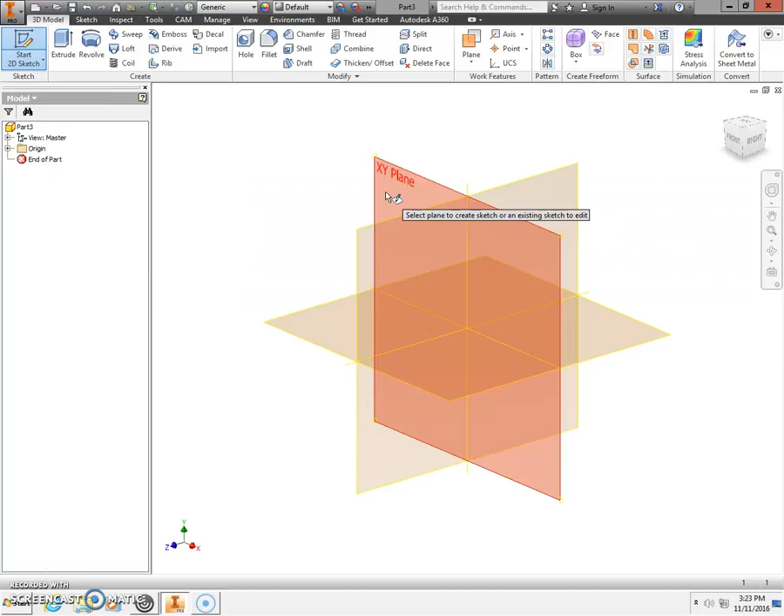Click the 2D Sketch button from the top ribbon, and we're going to put a 2D sketch on our XY plane. Click Front to zoom all.

Then we're going to select our rectangle tool from the ribbon and begin at our origin. Wait for the green dot to appear and click and stretch out a rectangle. The horizontal dimension for our lid for our box is 3 inches.

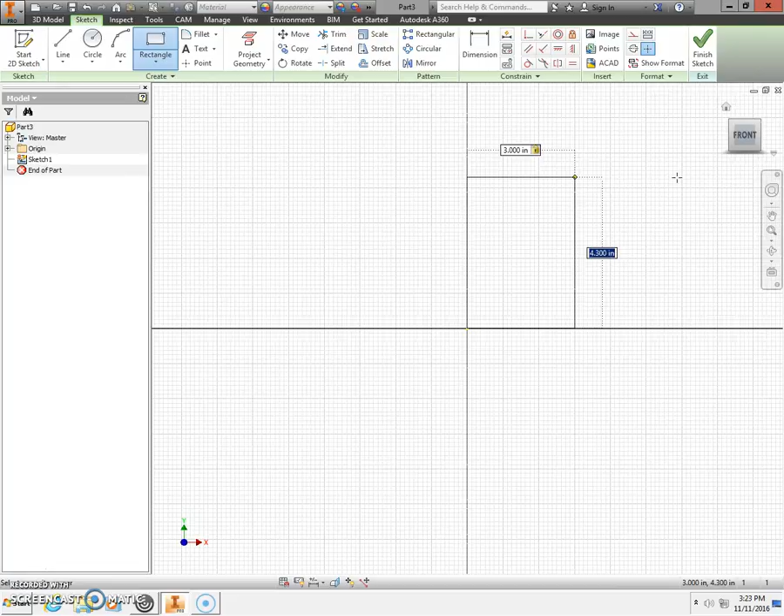Press the Tab key. Our vertical dimension is 3 inches. Press the Enter key on the keyboard.

Now we're going to go up to the top right hand corner of our ribbon. Click the great big huge green check mark.

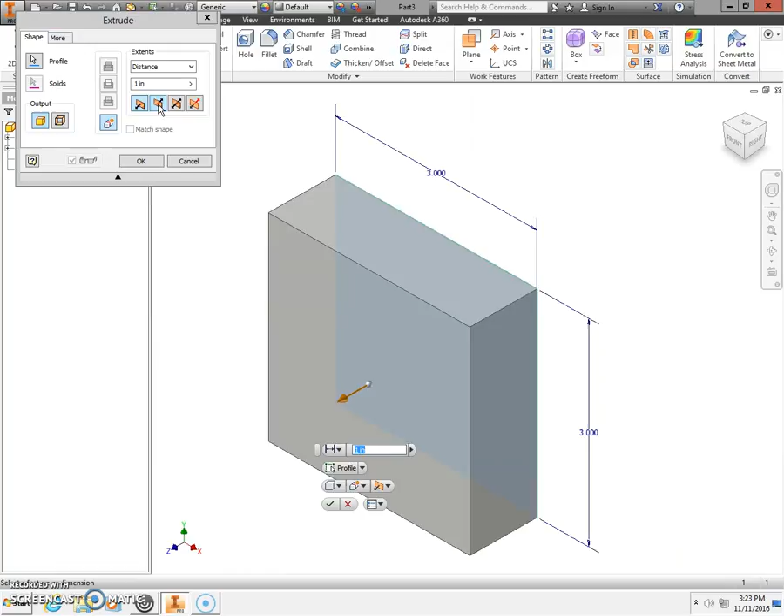I'm going to go home so I can see what's happening to my drawing part, and I'm going to click Extrude next. We're going to extrude in direction number 2, and I want to extrude a distance of 1.5 inches. And click OK. Next we need to recess a hole in here for our lid to fit over the top of our box bottom.

We're going to do that by clicking Start 2D Sketch and place a 2D sketch on our front view.

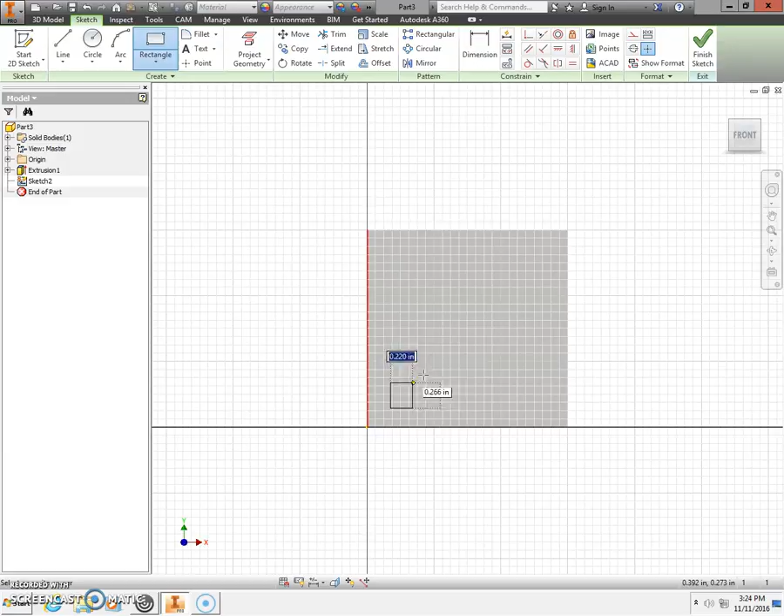Next, we're going to get our rectangle tool, and we're going to start in the lower left-hand corner of my part. I'm going to stretch a rectangle to my upper right-hand side. This dimension is 2.5 inches for a horizontal dimension.

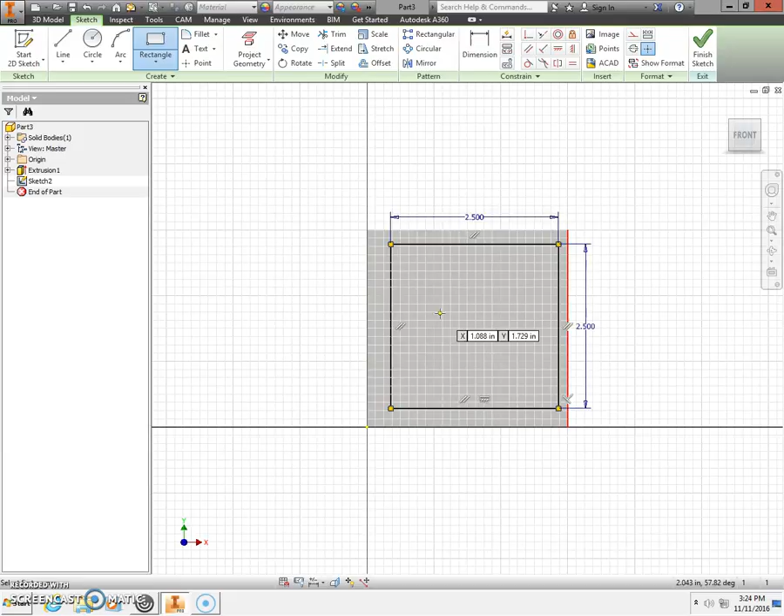Press the Tab key, and 2.5 inches for a vertical dimension. Press the Enter key. Now we need to center this square rectangle that we drew on our part.

So I'm going to take and select my dimension tool. I'm going to dimension from the left hand side of my rectangle or square that I just drew to the left hand side of my part.

Bring this dimension down. This dimension is going to be 1/4 inch, 0.25, and green check mark.

I'm also going to take and dimension from the bottom of the square that we just drew using our rectangle tool to the bottom of my part.

Bring this dimension out to the side. And this is going to be 1/4 inch, 0.25, green check mark.

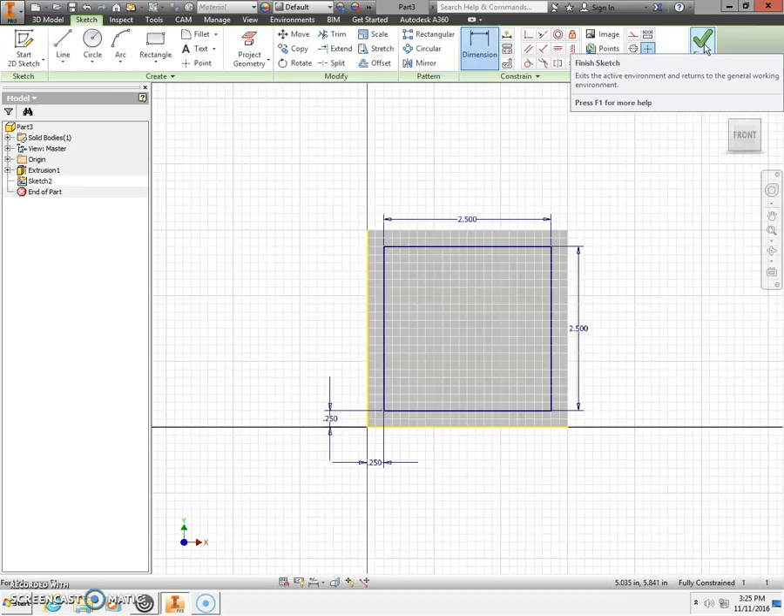With our recess drawn and dimensioned and a location dimension, we're going to come up to the upper right hand corner of our ribbon, click the green check mark, Finish Sketch, and I'm going to click my Extrude button.

I'm going to extrude, select the inner square that we drew. We want to extrude and cut, which is this one right here, the cut tool. And I want to extrude a distance of 0.75, which is 3/4 inch, and click OK.

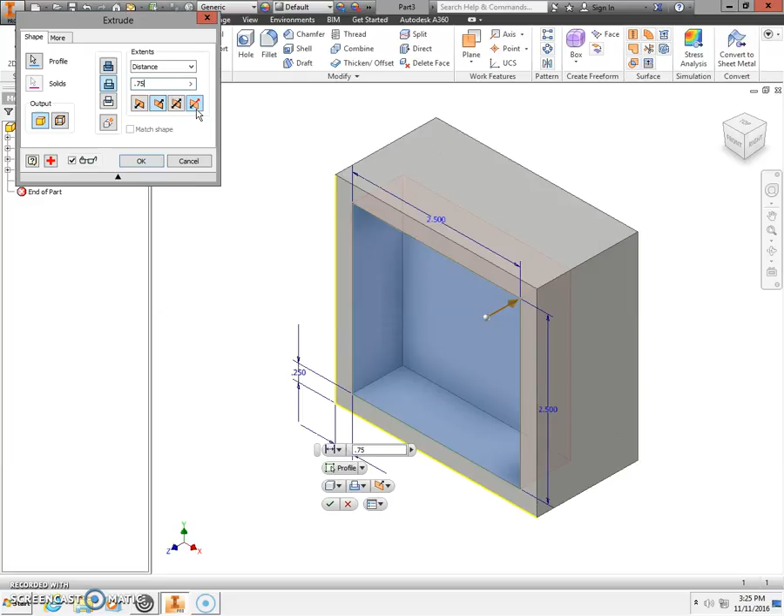Now we're going to come up to the top, right above the word Tab Environments, to where it says Default. And I'm going to change my material type from the default material to yellow pine.

Then I'm going to go up to my orange capital letter I, and I'm going to save as. I'm going to make sure this is going into my H drive, first initial last name 000.

And I'm going to call this my name and 3-inch lid. With an I. And then click Save.

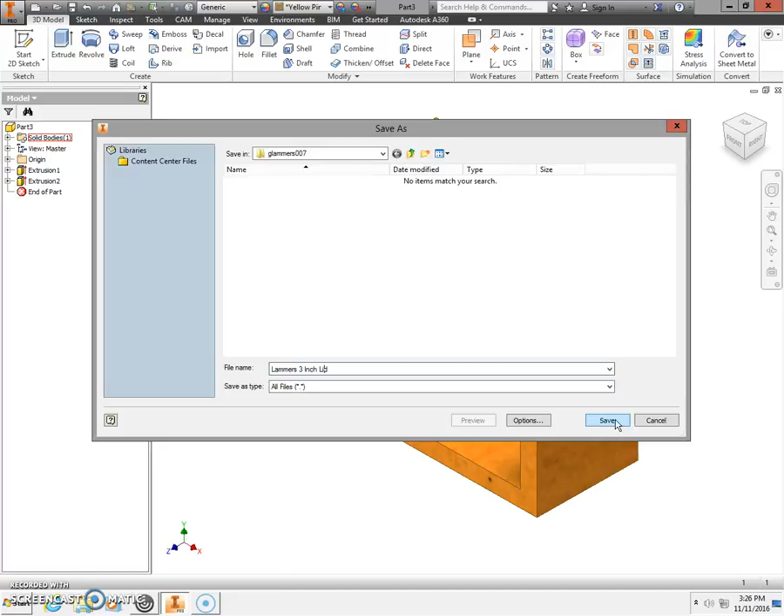Next we're going to take and run our tool paths. So we're going to come up to the top above our ribbon. There are little tabs that are up here. We're going to select the CAM tab, and we're going to set up our job.

So I'm going to click the Setup folder. First I want to change my origin from the middle to the lower left hand corner, so I'll do that here where it says Stock Box Point. I'm going to change to Model Origin. Next I'm going to set my stock up.

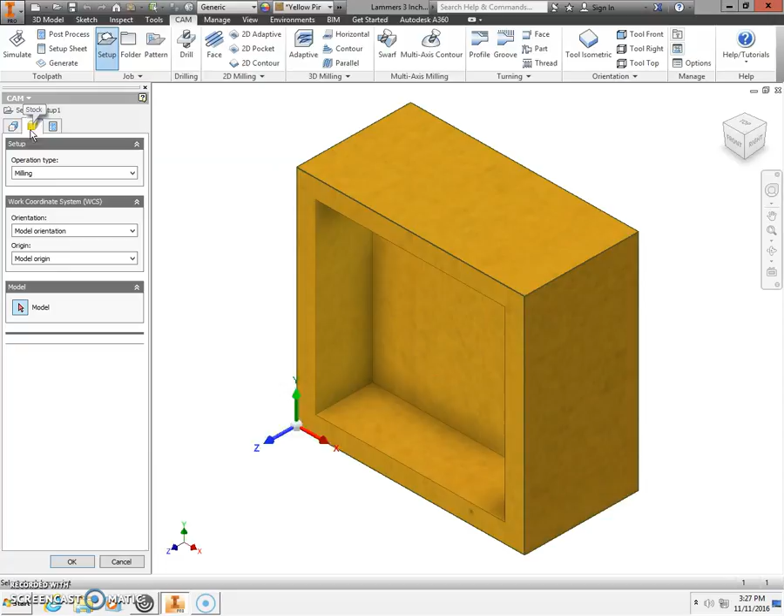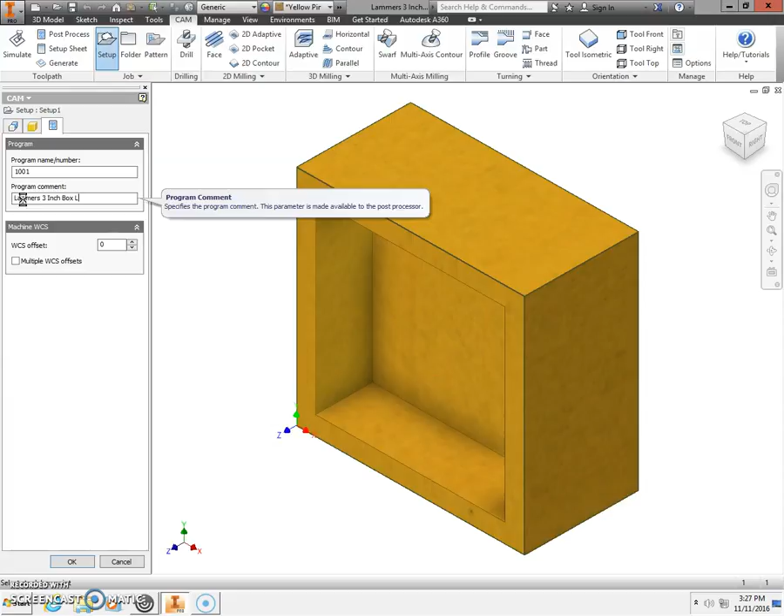I want to make sure that my depth is 1.5, and next I'm going to go to my post processor, and for my program comment I'm going to type in my name, .3-inch box lid, and click OK.

Next, we're going to go to our 2D milling area and select 2D pocket. Remember that we extruded this 3/4 of an inch, so we're going to have to take this in multiple passes. We'll come back to that in one second.

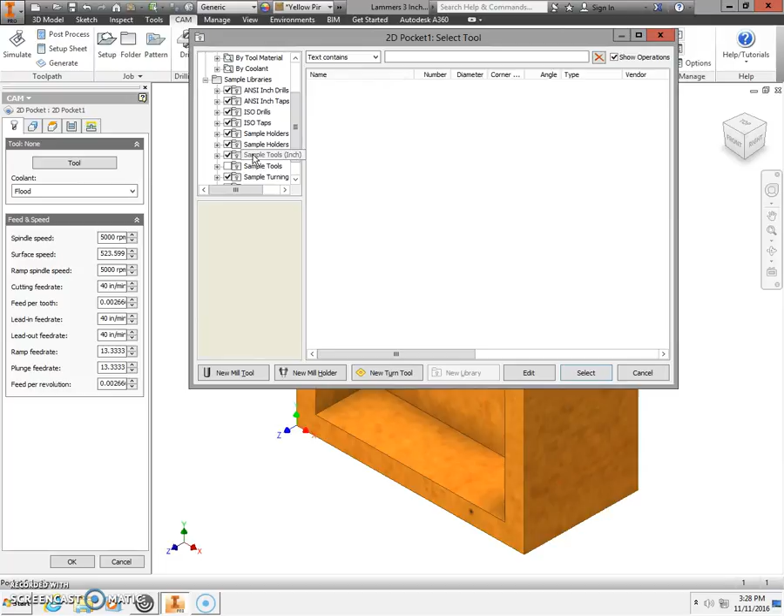When our menu loads at the left, we always work our menus top to bottom and our tabs left to right. So I'm going to select my tool first, and I want to scroll down till I find Sample Tools Inch. The area on the left, I want to scroll down until I can find my 1/4 inch tools, and out of all the 1/4 inch tools here, I want to choose the bottom one, the 1/4 inch flat end mill, and click Select.

Once my tool is selected, I'm going to choose my geometry to select, and here I want to choose only the bottom area of the ditch for the lid.

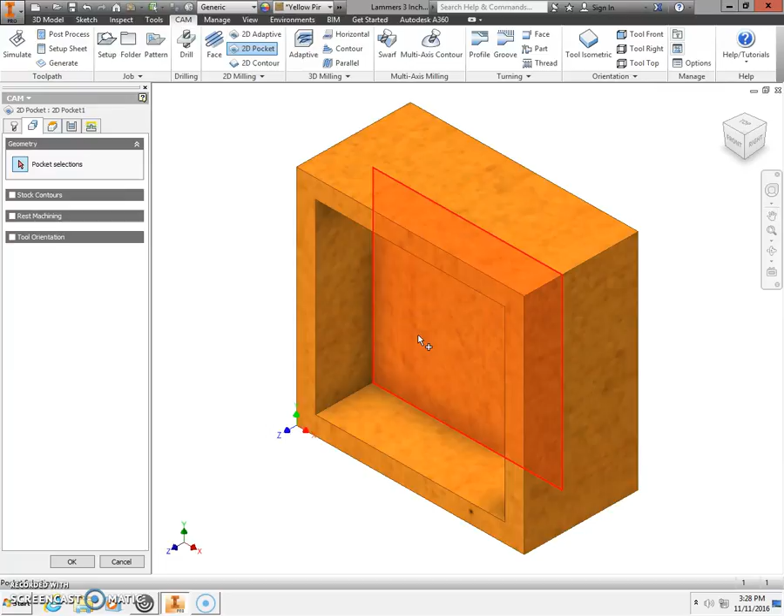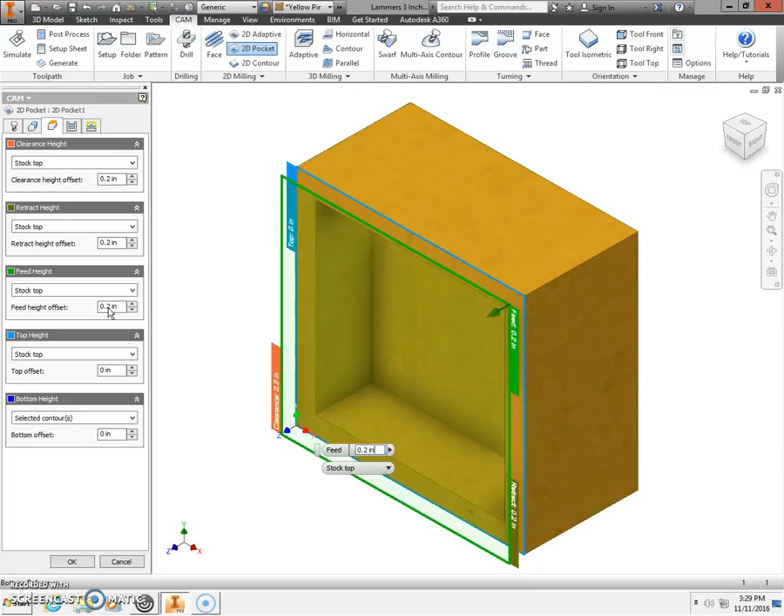Moving over, I want to check my heights. I'm going to choose my clearance height, open that window up, and change from retract height to stock top, and change the clearance offset to 0.2. Let's check the retract height selection, stock top 0.2. For my feed height, I'm going to change to stock top 0.2. Once those are selected, we can move on to our passes tab.

Where it says stock to leave, we're going to deselect that. Next, we're going to check multiple depths—this box needs to be checked. And where it says maximum roughing step down, we want to change this to 0.2. Very important that this is listed at 0.2.

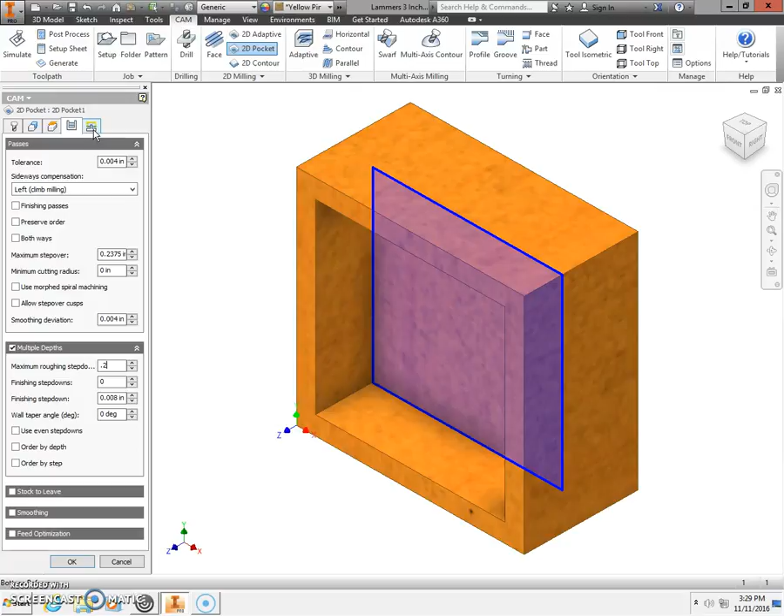And then we're going to move over to our linking parameters tab. Here in the linking parameters, we're going to deselect the lead in, deselect the lead out, and we want to change our ramp style from helix to plunge. Once you have those selected, we're going to click OK.

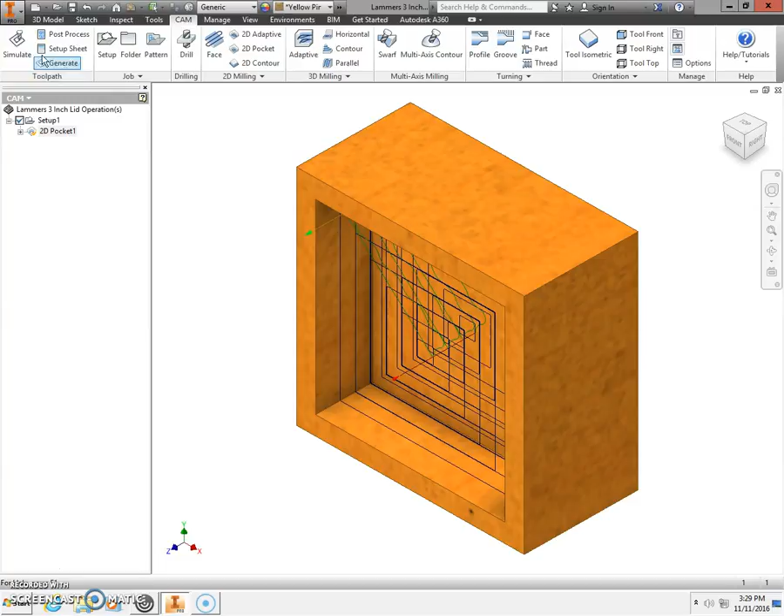It's going to generate your toolpaths, and you can see the multiple steps that it puts in there. Then we're going to click on our Simulate button up in the ribbon. Click Play. Once it goes through and finishes playing your simulation, we're going to click Close.

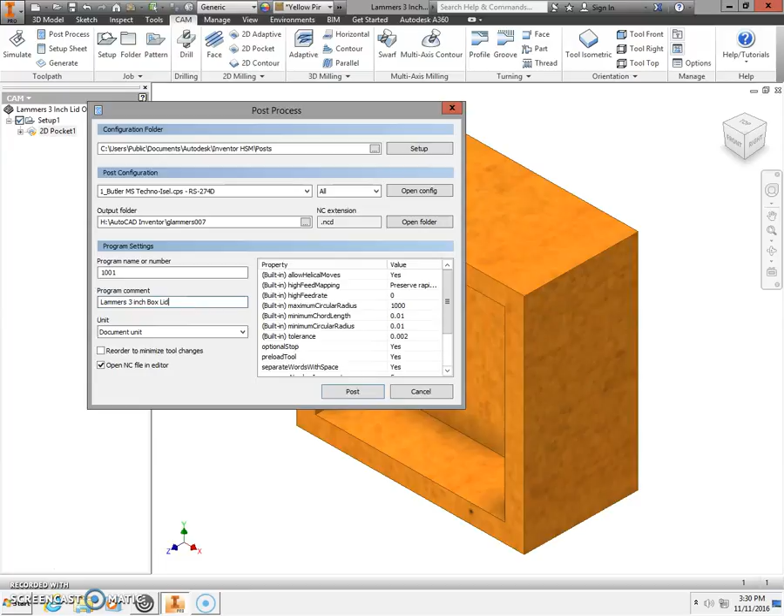Then we're going to choose the Post-Process button, which is right next to Simulate. We want to make sure that Butler MS Techno, the mill we are using, is selected. I want to change this to go to my H drive, first initial last name 007. I clicked right there in order to do that. Lammers 3-inch box, I'm going to change that to lid. So this should read your name 3-inch box lid, and click Post.

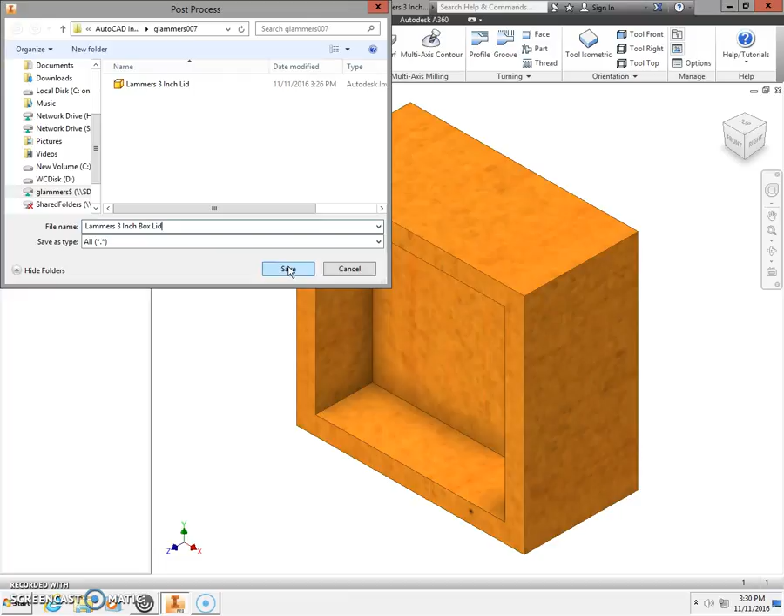Once again, we're going to type in your name 3-inch box lid and click Save. When our M&G code editor, or file editor, comes up, we're going to X this out in the upper right hand corner. You can minimize your Inventor, and then on the desktop you should find a CNC mill icon.

We're going to click on that. We're going to select Translate Execute. I'm going to select my Lammers 3-inch box lid, the NCD file, and click Open. Select OK on this window, and now I want to preview.

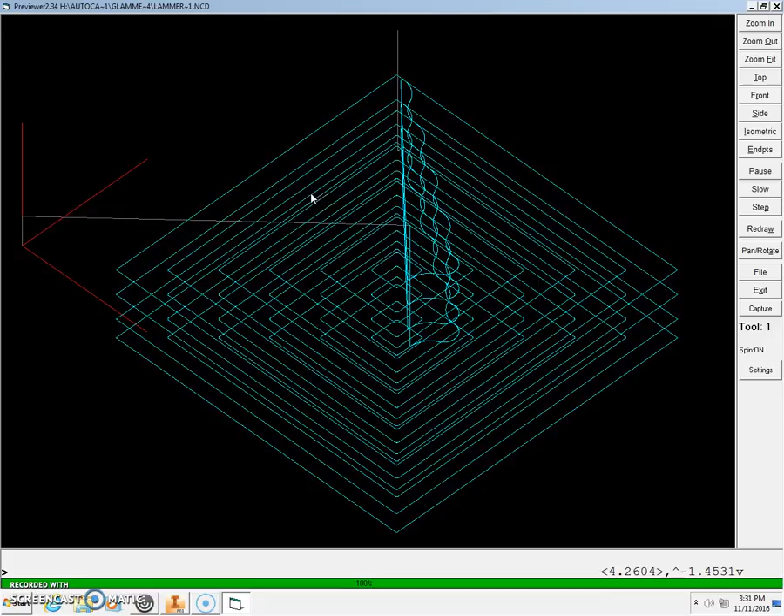When your teacher comes over, he wants to see this. You're going to press S on the keyboard, F on the keyboard, and then you're going to call your teacher over to check your toolpaths before they'll let you cut.

Once you have this cut out, your box bottom and the lid should fit together nicely. With a little bit of sanding, it'll smooth up, and then you will be done. Congratulations, nice job.